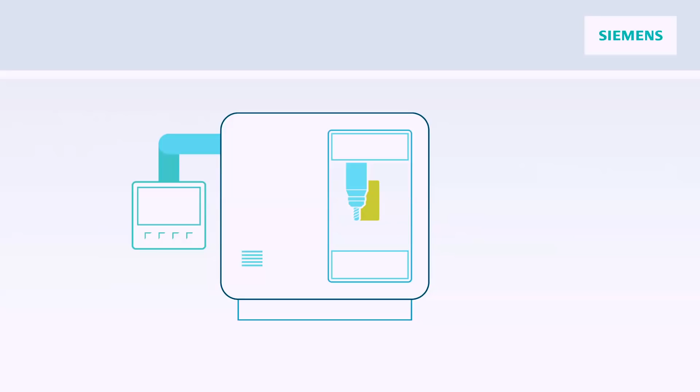Exactly, and manufacturers were finding themselves in a situation where their product was obsolete, but they weren't yet ready to manufacture the next version. So the market has basically moved to using NC machines to manufacture those cases, due to the tight link between the CAD, CAM, and the NC machines. Basically, you can introduce a design change by the click of one button, an instantaneous update of the design.

Yeah, this was a huge step forward, going from waiting for months to instantaneous. Manufacturers took thousands or tens of thousands of these machines, installed them in their factories so they could ramp up production. Who would have thought 5 years ago that this was a valid business model, but now it's the norm. It's a great example of digitalization disrupting the industry.

Okay, so we have it: CAD CAM, and you're good to go to the digital world. No, hold your horses, Magnus. That may be true for cell phone cases, but innovation's driving down the cycle times and the lot sizes of every industry. So cell phone manufacturers have taken a huge leap in regards to speed, flexibility, quality, and efficiency.

And this is something all industries should start doing, whether you're doing trains, aeroplanes, high-tech electronic equipment, or whatever. It applies to all industries, even personalized medicines. And these are all very complex products. So there is no ultra-simple solution. You can't automate your way out of these challenges, and if you focus only on the automation aspect of manufacturing, that's just not enough anymore.

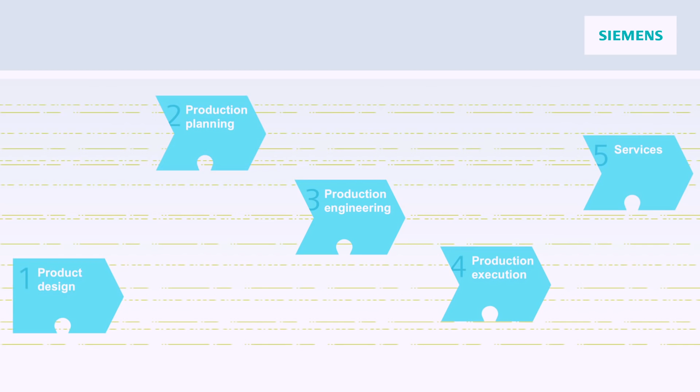That's correct. So what needs to be done then? Well, you need to weave a digital thread throughout the entire value creation chain, starting from design, manufacturing planning, the engineering phase, the production, and also services — a carpet of information throughout the entire value creation chain. And once you have your complete value chain digitalized, with your supply chain included, that's the very moment when the magic happens.

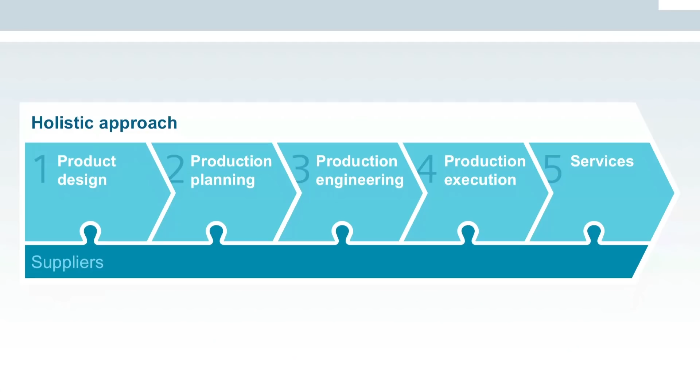Yeah, and that's really not a joke. For those of you who have not seen this, it wasn't even a very good joke, but this is really an amazing point.

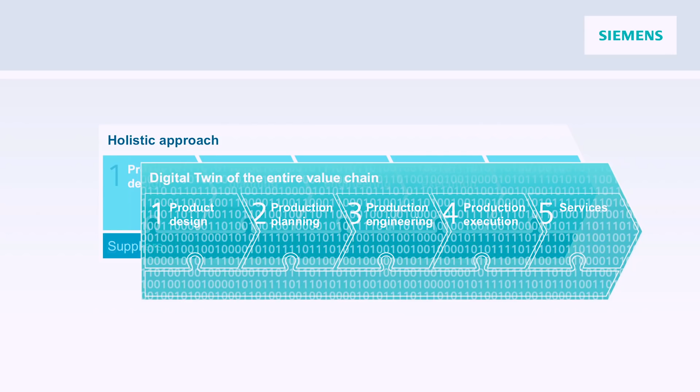It's one of the key messages in our story. We are able to take the digitalized and integrated value chain and make a copy of it, a digital twin, a virtual world that runs in parallel to the real world, with products, even complex ones, equipment, and processes. We can use simulation to determine how these interact, to understand if there'll be blockages or problems in the future, and resolve those in the virtual world before our customer ever has to commit resources in the real world.

So when I listen to you describing this, Alastair, to me it sounds like, I'm not a gambler, but I could tell which horse would win the race before the race even started. Exactly, it's kind of cheating. I like to use another analogy. It's like you can throw yourself out of an aeroplane knowing for certain that your parachute will open because you've already seen it in the virtual world. Extremely important information if you're stuck in that situation.

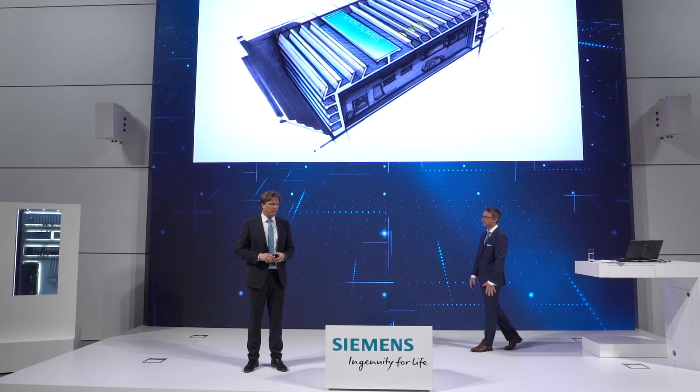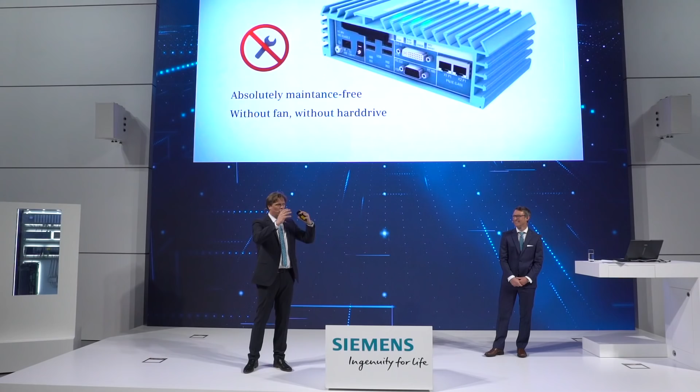So now we've been talking about this value chain for a while, and I will take you through a few of the steps. We're going to use one of our own Siemens products, the IPC NanoBox, an industrial PC about one liter in size, very compact, very sturdy. It's put to work in a very aggressive and violent environment. We're talking vibrations, hot and warm temperatures, cold, electromagnetic fields, etc. Basically those are the requirements this little IPC is facing.

So when you start to design, you collect the requirements, you see what customers are expecting of this product. Once you start to design, the design engineer knows exactly how he needs to do the design of the NanoBox. In this case, we also try to reuse as many components as possible to speed up the design process.

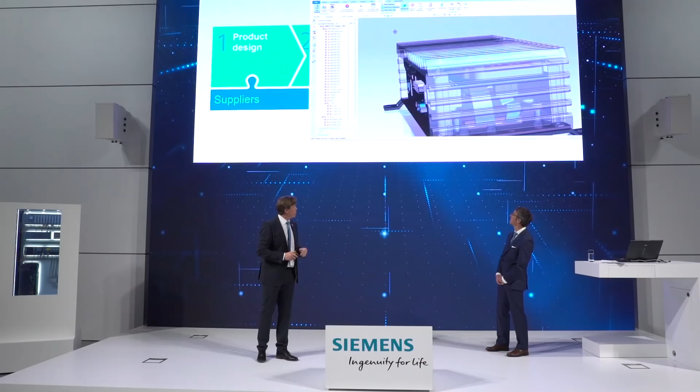This is really cool, Magnus. It's very, very lifelike, but it's still inside a computer. So I imagine the next step of our process is to build a physical prototype and test it to see if it works, right?

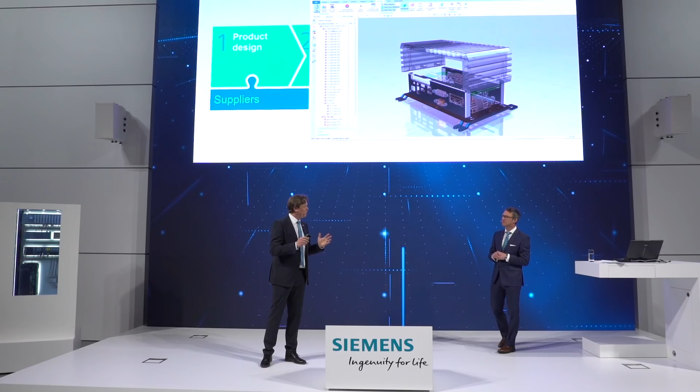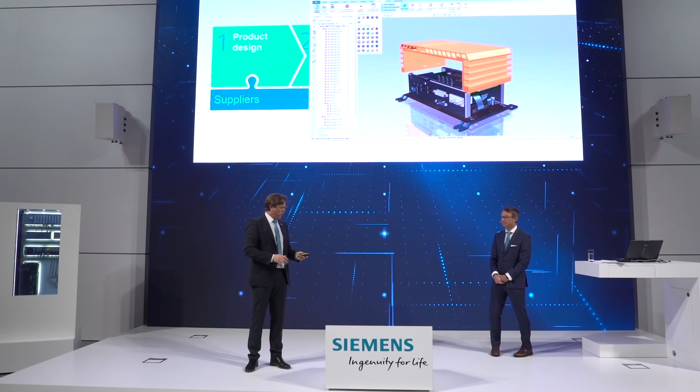No. We're talking digitalization, Alastair. It's a difficult word for me to pronounce, but fairly easy to understand. So we have the NX CAD, CAE, and CAM solution, integrated software. The design engineer models the NanoBox, and then the simulation engineer takes this information, knows the requirements, and builds a simulation to test things like vibrations and heat development. If he discovers a problem at this phase, he can easily communicate that information back to the stakeholder, or the owner of the design, all in a virtual environment. That's digitalization for you.

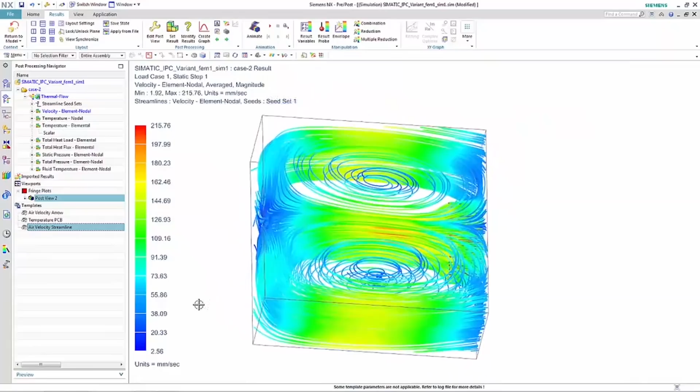Yeah, we build the intelligence directly into the model itself, so all the engineering colleagues can collaborate around this model. They can simultaneously engineer the product and its performance without having to rely on a final step of system engineering, which slows everything down. And we do all of this in the virtual world without building a physical prototype.

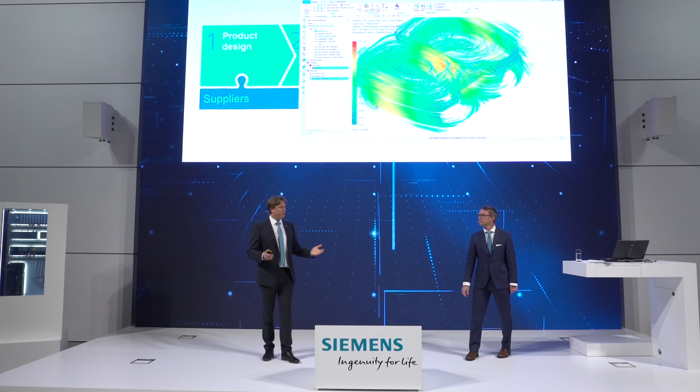Alastair, I'm proud of you, you just explained systems-driven product development. Amazing. Basically, as you said, you take the requirements, do the design, and build a digital twin of your product that you can use in the next step, the production planning.

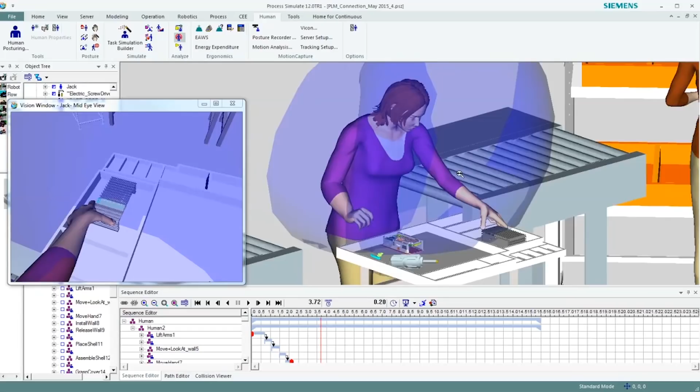You want to make sure you can build this NanoBox. In this movie, we're using Jill, a digital mannequin. You can use her arms to see what she can reach, use her eyes to see what she can see. I can even check what forces and torques are affecting her spine, especially in the fourth and fifth vertebra, where most work-related injuries actually occur.

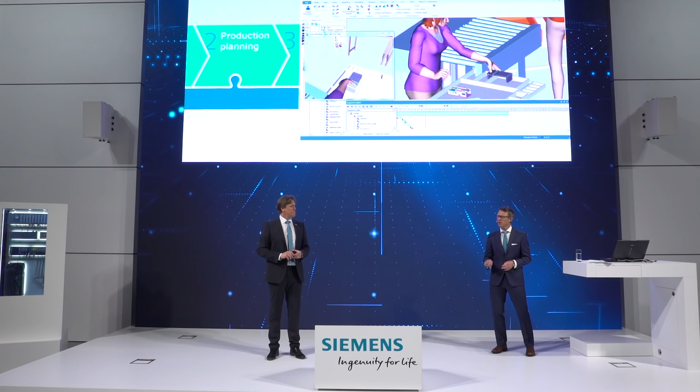That's awesome, I love the idea of digital people in our virtual world. But our customers are also asking us a lot about robotics, and I don't mean those big robots in cages. They want things that sit on the shop floor with a couple of arms and can help the people in the assembly process. Can we deal with those?

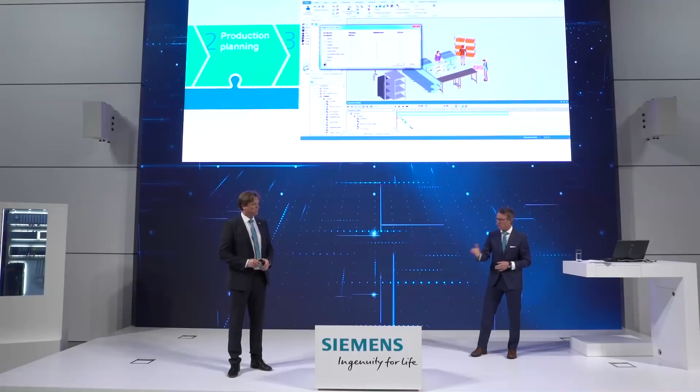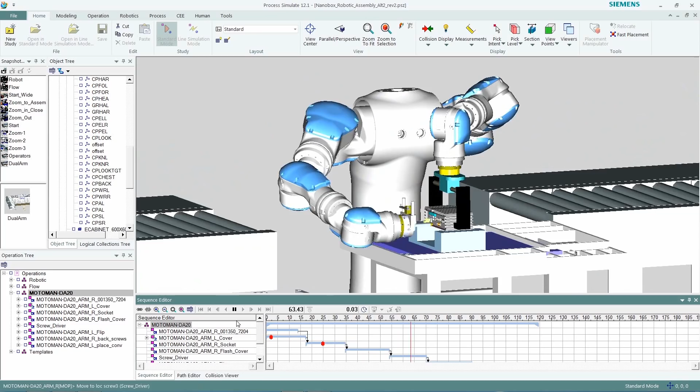We can. So basically take Jill out of the picture and put in a robot instead. What we've got here is a dual-arm robot. We program it in our virtual world, making sure we don't have any collisions, which may occur if you're in a narrow environment. Bang. You want to discover that type of collision in the digital world because it doesn't hurt anyone, you don't break any resources. Those are the benefits of working in this environment.

Let me take you to one more step along the production line. We have requirements regarding the product, but also requirements regarding the output, the volume. How many do we need to produce of the IPC NanoBox? That we can check with plant simulation, basically discrete event simulation. How many components are floating through the factory? Do we have bottlenecks? We can even check the energy consumption of this facility digitally.

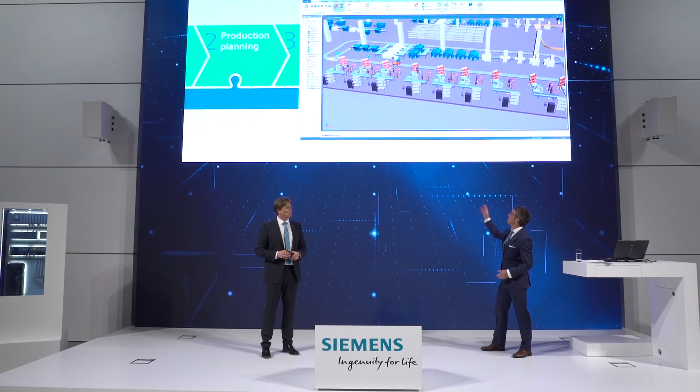It's amazing, this is really where it all comes together. I've got everything there, the people, the robots, the logistics. It's awesome, but it seems to be running at real-time speed, what's the point of that? Well, the point is, dear Alastair, that I can tweak this so it runs at like 1,000 times real time.

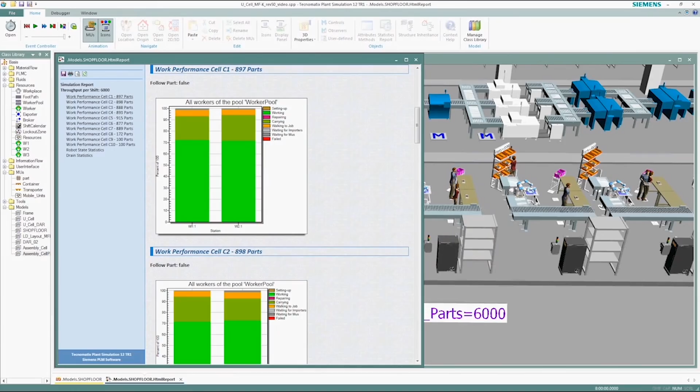Which means that within minutes, I can simulate like a month worth of work, or perhaps even a year. You can look into the future a year. I can look into the future. That's your crystal ball right there.

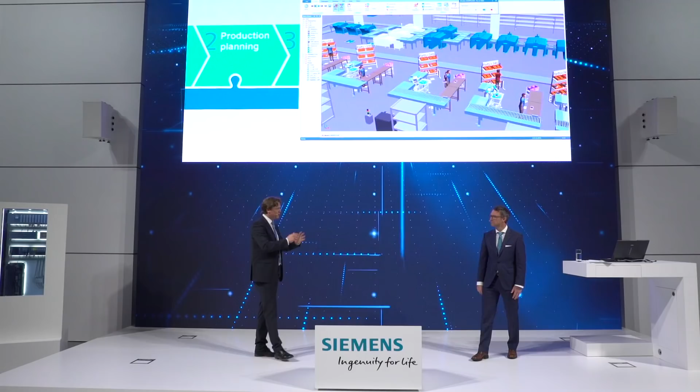So now we've been through step number one, the design phase. We've taken the digital twin and used it also in the production planning. And in this way, we have checked every aspect of the production process. Okay, so I was right, this virtual world is awesome.

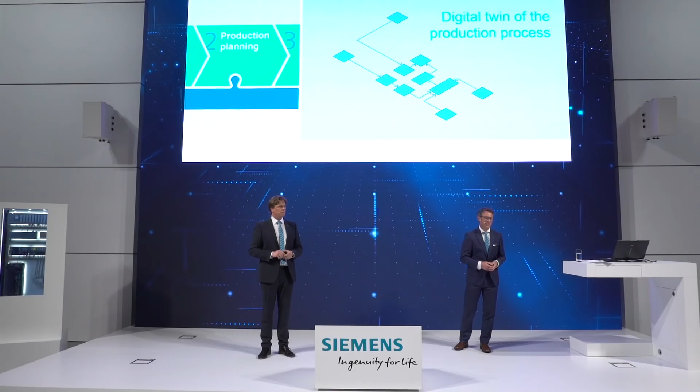The question is, can it really work in the real world? And the answer is not until my automation code is written. It's normally at this point when our customers send an army of engineers out onto the shop floor and they start coding the PLCs. Essentially, the digital thread is broken.

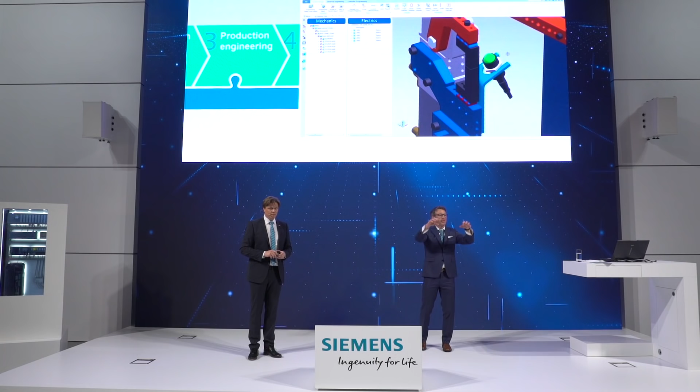Well, we want to create an end-to-end digital enterprise. And so we're extremely proud that this year, just behind you in the booth, we can show you the first truly integrated mechatronic engineering suite. We're taking the mechanical aspect of your robots and your equipment, and for the first time we're extending it to cover also the entire electrical and automation aspects of the machines.

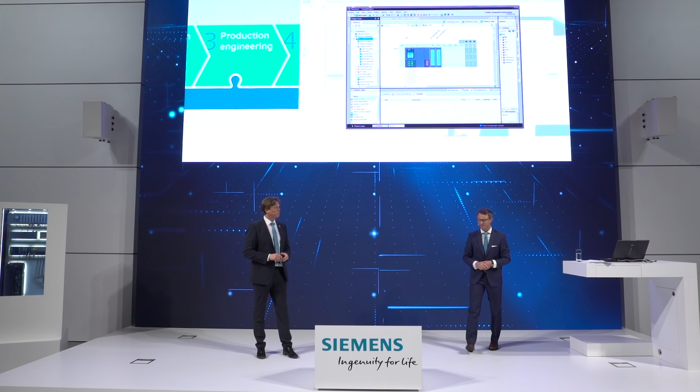Check this out, Magnus. We're actually taking all those movements and we're using it to derive all of the automation code. No more writing automation code. We're automating the engineering and we're downloading it into the TIA Portal so it's ready for production.

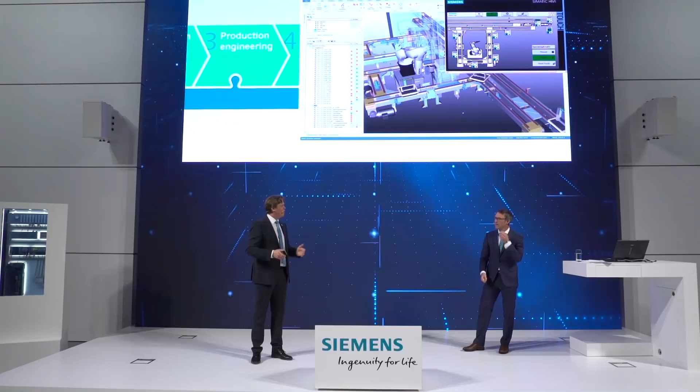Amazing. So instead of asking our customers to take their PLC code down to the shop floor and test it on a real system, we actually take the controllers and hook that up to our digital twin, a virtual world, making sure that the program is bug-free and everything. And that's what we call virtual commissioning. That's another thing you can see behind you in the booth. We have a real robot, we have a virtual robot, and we can switch our automation to control the real one or the virtual one.

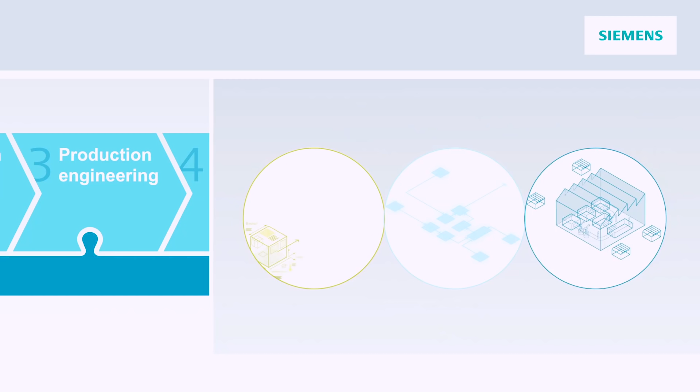It's very compelling. Now we've completed our digital twin. We've designed and defined the product, the process, and now every aspect of the equipment. And I really talk about these as separate parts of a digital twin, but they're fundamentally integrated. And it's this integration which allows our virtual world to act and react as though it's real. That's where the real value comes from.

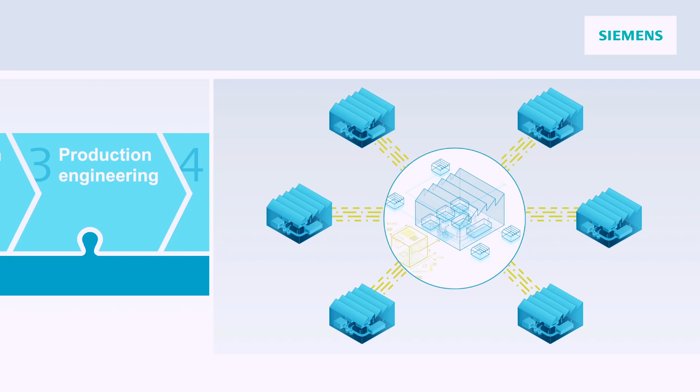So now we take this optimized digital twin. We, of course, communicate this to all the stakeholders involved in this process using our amazing collaboration platform, Teamcenter. So without delay, without uncertainty, this very moment is where the rubber hits the road. The rubber does hit the road. And this is another point in a traditional company where the digital thread can break. Engineering and operations are usually disconnected, but not in a digital enterprise.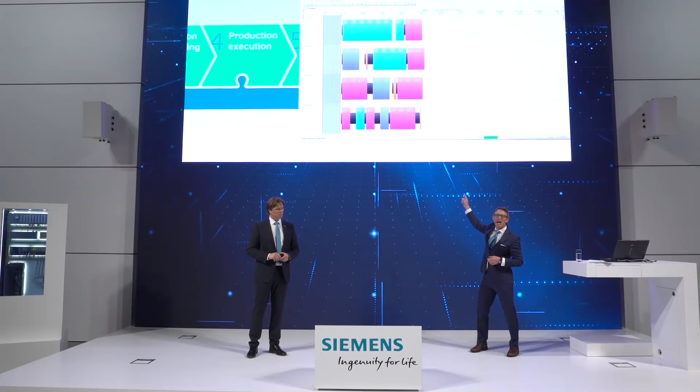So the trigger for us to start production is usually an order coming from the ERP. But because the ERP doesn't have access to our integrated technical data model, our digital twin, the order schedule it sends down is not very optimized. All these black bars here, they're changeovers, they're waiting times, they're lost opportunity.

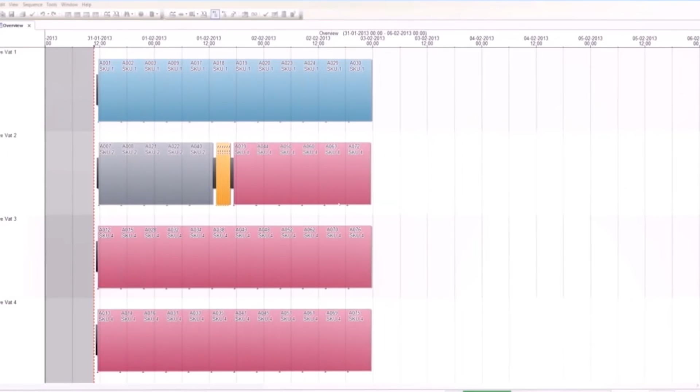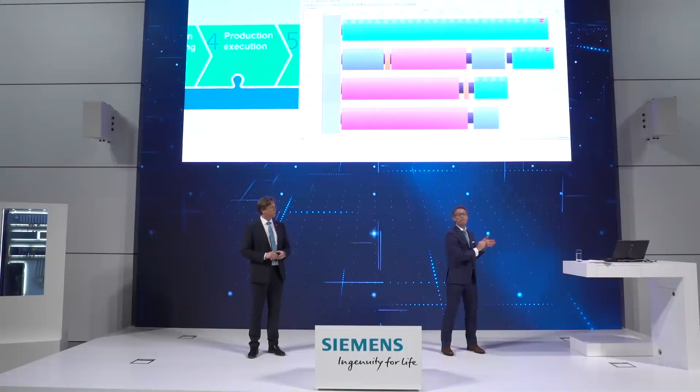And we're going to take that, we're going to reschedule it using the detailed information in our digital twin. It's now fully optimized, all our resources are allocated correctly. And we're going to take every one of those orders, and an order now can be a lot size of one, and we're going to associate it with our digital twin, with our bill of process. That's the kind of manufacturing blueprint you can see up there, sitting at the enterprise level.

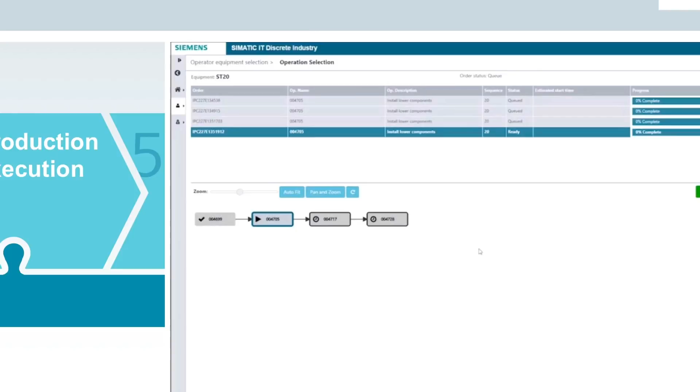And we can push that into our plant in Mexico, in China, in the US. There it is on the shop floor now, ready to execute. That execution is done by the MES system, the manufacturing execution system. It'll use the bill of process to coordinate and synchronize all the resources, the people, the machines, the logistics, and it'll make this product right first time.

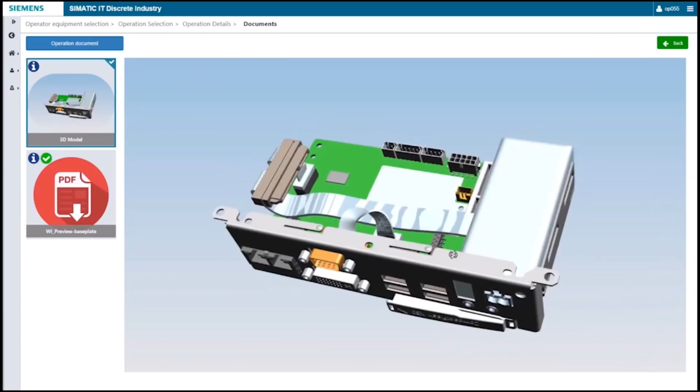And it has to, because if we only have a lot size of one, if it's an individualized product, if we don't get it right first time, we go out of business. But we also need to keep in mind that many of our assembly operations are still manual. And throughout the journey from design through manufacturing, planning and so on, we have generated a lot of information, and we can use it as electronic work instructions.

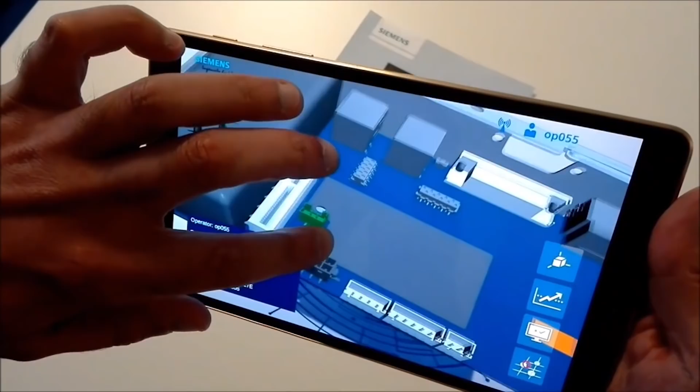So this information is now sent down to the shop floor, to the assembly line, to the correct and the right operator at the very right moment in time, so that she or he can actually assemble our product in the best manner possible. We can use it on a normal monitor, or as you can see here, a tablet PC with augmented reality. Really, really cool stuff. We want our plant and the people, the real one, to behave like the simulation. So we blend the real and the virtual world. And again, this is another compelling demonstration that you can see in our booth afterwards.

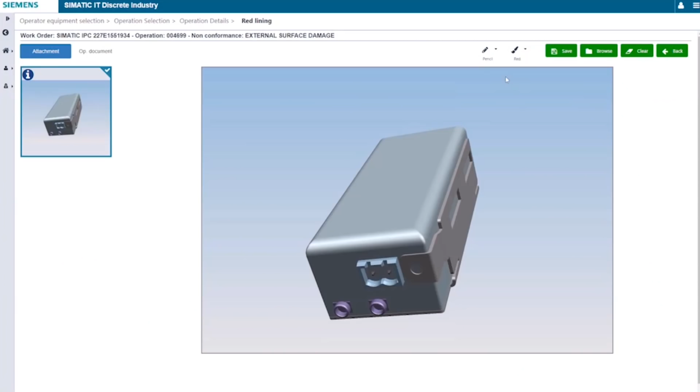So as the production continues, the MES is creating an as-built document, which we can continuously compare to the as-engineered and as-planned definition, and we can find any deviations. Those deviations can be used to keep production on track.

Any defects we find normally would stop production, because the operations guys don't know how to deal with them. But in a digital enterprise, engineering and operations can work together. The operations can reach into the digital twin, redline that model with the problem, and hand it back over to engineering.

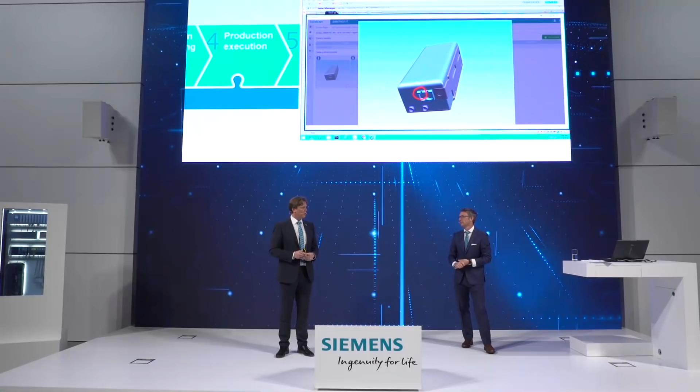So at this moment in time, our product is produced, it's made on time, on spec, and of course also on price. So you would think now, okay, that's when the life cycle stops.

No, it does not. So if we take a scenario as such, let's say you're a machine builder, then it's very likely that your machine is actually put to work at your customer's side, producing products, but also generating a lot of important data that we can analyze and use to optimize the entire process and the entire machine, and schedule maintenance work, etc. So you have a very nice ownership experience, to be honest.

Precisely, and if I am that manufacturer, I'm using the machine, I'm going to be producing products—tens of thousands, hundreds of thousands of products—and selling them into the market, hopefully. But they're smart products, they're generating data too.

And just like we did for the machine, we can capture all of that data, aggregate it in our cloud, derive insights about real-world performance of that product, define firmware updates and push them into the running products in our customers' homes and factories. And we can take all of that learning and build it back into the next generation of the product seamlessly and easily.

Speed, flexibility, quality, and efficiency. Alastair, seriously, what else do you need?

Well, nothing really. We've taken our value chain and made it agile. Now our company can navigate in the market, navigate towards opportunity, away from peril. And we can take the classic PLM, MES, and automation domains, and weave them together into a digital enterprise, one that is capable of delivering true closed-loop manufacturing.

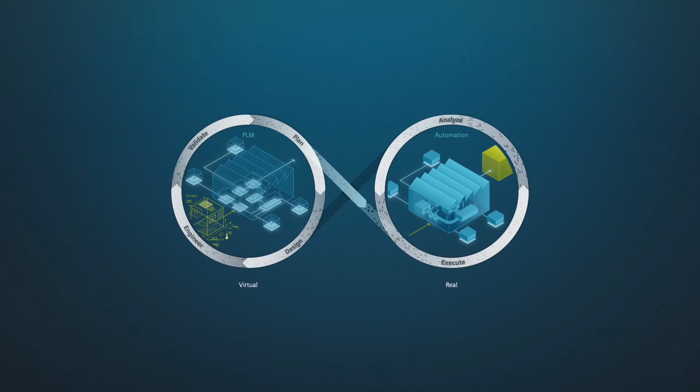So basically take advantage of the virtual world to deliver answers to requests from your customers with ridiculous speed, correct? And when the customer says yes to this individualized design, we can press another button and use the digital thread to produce it in the right factory. And it will be right first time, because we already tried it 10,000 times in the virtual world.

And all the data it produces, we're going to build back into the virtual world so that our company is growing and improving every time.

Now, a year ago, Magnus, we stood on this stage and described how we had built 15 years of digitalization experience—not only us—into a unique product portfolio called the Digital Enterprise Software Suite. Well, we're very happy after one year to tell you it's still completely unique. There's still no other company out there creating a holistic solution for digitalization.

But during the last year, we've taken another step forward away from our competitors, because we built into our suite full data and lifecycle analytical capabilities. And it doesn't stop there, because every year when you come back, you'll see more amazing things that we have invented, developed, and built into that product.

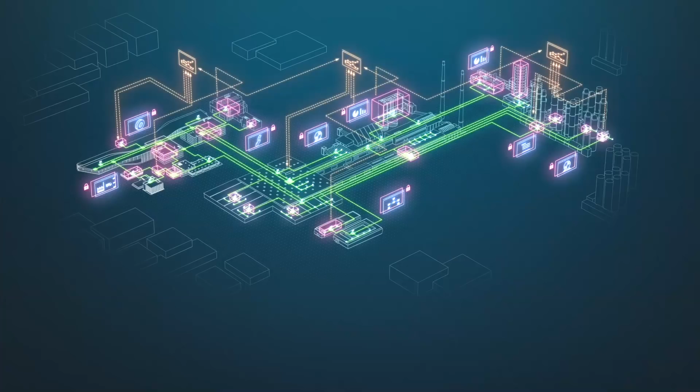So if you buy into our Digital Enterprise Software Suite, you're going to be able to take advantage of this year after year. With Siemens, digitalization doesn't have to be a dream. It's reality now, and we invite you to take that opportunity and start building your own digital enterprise.